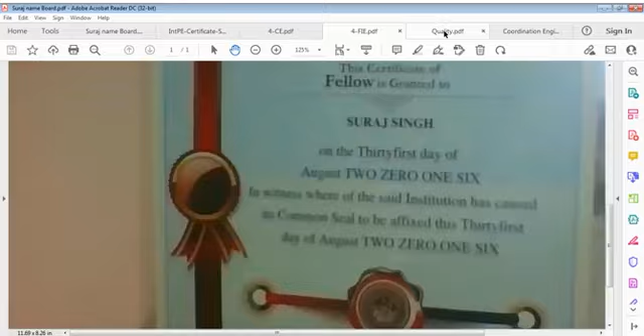Here is my international professional engineer certification for 5 years, valid up to September 2025, and this is chartered, top grade. For the time being I put this off, and I close this file so there is enough space here. Now I'll open the file which is concrete specification.

That is real quality, the real quality file. Let us see what happens. Real quality and real coordination. When I say real quality, it means real achieved quality or to be achieved. It's not in air. It's not in talks only, not in writings only, not in documents only, not in claims only. It should be in reality.

Product must speak. Whatever product, consumable or otherwise, building or structure or machine or an electronic gadget, this product must announce itself: I have been produced according to requirements. Requirements were met when I was produced. I am fully competent, consistent, I am able to perform for you the purpose for which you are buying me. That's what the product should tell. Product must announce.

For youth, for budding engineers, and for common people to realize the value of quality engineering and coordination engineering. In engineering, these are requirements. Even if you don't define them, they are still required. Young engineers must understand this point. Don't run away. Don't skip coordination. Don't skip quality. Even if you work in the designs domain, do not forget that you have to produce your design per quality requirement, and that quality requirement of what?

First time right, all time. It may not be 100% right, but it should be right. You must know which information you need, because of your sequence of work in designs, your calculations, and the site people's expectation from the designer. If I am on site, what expectation do I have of the drawing, what information may site people expect?

Currently in the entire scenario in ours, Bharat, India, and preliminary considerations are there. Someone does good work, but in general, I can say no. Unsuccessful, I'm not getting anything, but I'm trying to see that development, it may be in our country or in other countries. It should be fine, it should be up to mark, if not 100%, maybe some tolerance there.

I have seen Qatar, Iraq, Libya, Saudi, Abu Dhabi, UAE. I have seen throughout my career, particularly post-graduation career, and I have worked more than 20 years in these countries, in different organizations, at different levels. And of course, I cannot say that I did everything right. I can't claim that, because when I was learning and in the field, it's very difficult to find good people to teach you. You won't find teachers in the field, and that's where the deficiency lies.

It's not only in our country, but everywhere. In the practical field, in the construction field, I'm not talking of machines, I'm not talking of industrial works, I'm talking of the construction domain.

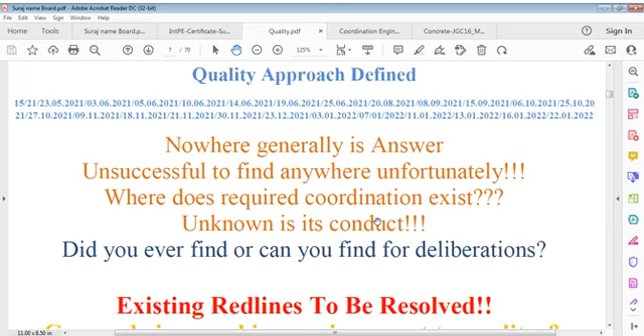Where does required coordination exist? That's the question mark. Unknown is its conduct. That is very important. And that's why I say, did you ever find, or can you find, for deliberations existing red lines to be resolved? Red lines means unknown. We do not know what problems may come, but problems do come because of some missing item, because of lack of coordination or lack of vision, you can say short of vision.

Can we bring the working environment to quality and coordination requirements? That is what we have to answer. Again, I say certain red lines must be turned green, and that must be a must, which you have to understand. Can we know?

Again, there are so many lines, many times I have repeated. I know it, but I'm going to another file, which is now the coordination file, and that is reliable coordination, engineering projects, and engineers, and that is again the same, but with different toning, different. This is a kind of application file.

Applications, I now find a difference in my learning from that. When I started my foreign career, overseas career, I'm not counting my career here at that time because that was a supervision career. Supervision is not as critical as work to be done on site.

And that's why I say missing real coordination means missing good engineering. And if you cannot coordinate, whatever way, you cannot leave it to software, because software can't replace your mind. What you see, what you think, what you do is more important, because you are a teacher, you are a checker, you are an examiner of yourself, you are a student of yourself, a researcher of yourself. Means personal contribution, personal involvement.

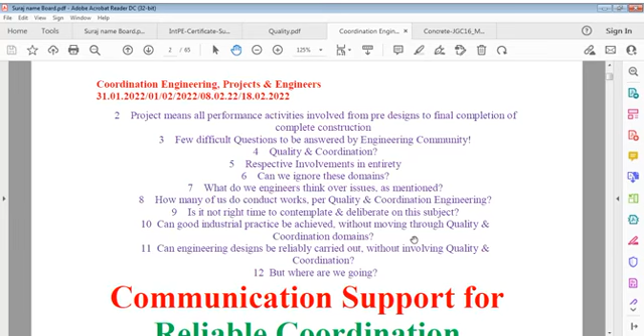At this point we have to keep in mind, and that's why we can say, is coordination a must on every project? Project means all performance activities involved from pre-design stage to final completion of construction. Can we ignore these domains? You have to give an answer. If you ignore these domains, you ignore your project.

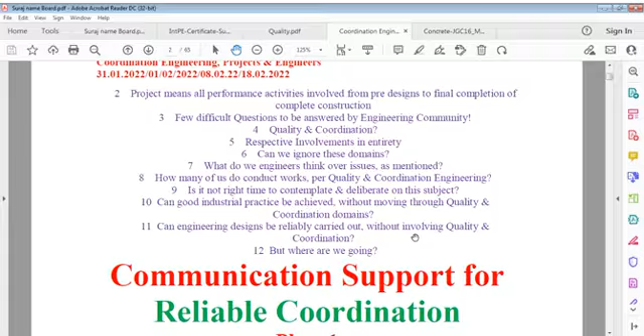What do we engineers think over issues, and how many of us conduct work per quality and coordination engineering? Is it not the right time to contemplate and deliberate on this subject? Can good industrial practice be achieved without moving through quality and coordination domains? Can engineering designs be reliably carried out without involving quality and coordination? But where are we going?

Communication support for reliable coordination - my concentration is on coordination, and I'm very upset to see people are not inclined towards coordination. Had they been inclined, they would have majored in it.

There was an abundance of information available on the internet regarding quality and coordination, but I could not find that information. Even after searching a number of times about coordination and quality, it's only the same repetition, same way - some research paper, some other paper. Actually no material is available, to be very frank, and I'm upset, this is an upsetting situation. That's the only way - I try to fill something on the internet using these videos as a medium, about dissemination of information about quality and coordination. Coordination information is equal to zero on the internet, and quality - as far as it's concerned - it's only system information that is given, not real information.

Quality systems exist, we know that, but the systems are not quality - these are quality relations, how to do that. And that is not actually required. What is required is people should know what work is done, how this work is done. They should know something about that, but that is not available, and particularly in construction engineering it's not at all available.

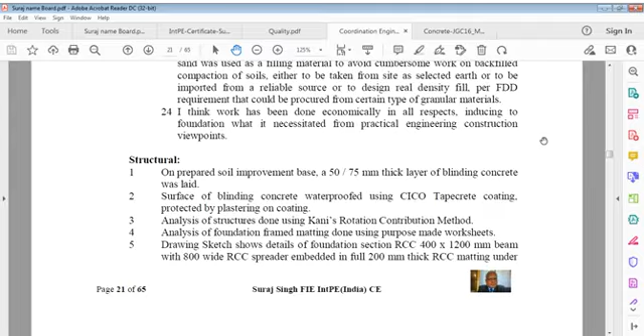yes. Here I think we have to see what is given here. That is about the coordination issue. I think that is a bad one.

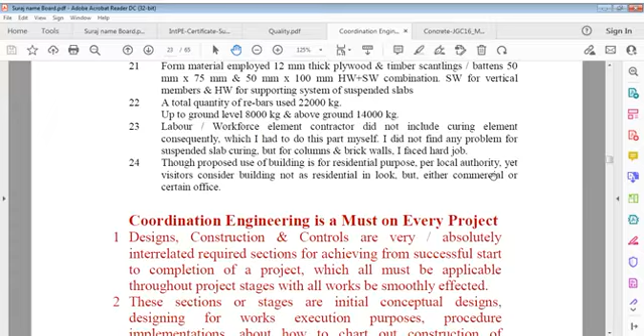Engineering is a must on every project. This is the title: coordination engineering is a must on every project. And it's written about design and construction. These are absolutely interrelated terms, and these sections are for achievement from successful start to successful completion. I'm saying successful start because there's a meaning behind that.

We have to start, of course, but successful start means we should have all information ready with us before starting or commencing some work. If we have to commence some work, then we should have complete information. There is no meaning if you start some work and then you stop after some time, you hold work because you don't have complete information. I think that is not the professional way.

You should know, let us say, at least for a couple of months that you are going to work for, when you plan that work, it should move without any problem, and if some information is missing, that should come by the time that activity is started. That should be planned. Sometimes information is not available, but it doesn't mean that we can't work, because there is so much information required on every project. Sometimes we don't have some, but we should keep in mind that when that activity comes, that information must be available by that time.

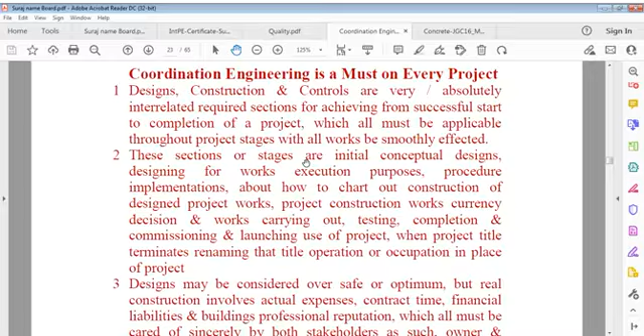I always investigate on me. I only apply corrections on me, and that's where it's important. Designs may be considered over safe or optimum, but the main point lies in how your design shall be transformed to physical work. To what level it is done, how many percent it is achieved, it depends on that.

And that's why I say it's very important to keep an eye, means mental eye as well as physical eyes, both. Not simply viewing eyes, means eyes that can accept something, cannot accept something. A constant touch is required on activities. You know, our people everywhere are enthusiastic. All are pro quantity. They do not really know what is the value of quality.

It's the fault of the system. Quantity is preferred by everybody, but everybody has to keep in mind: if you prefer quantity, quality is an integrated part of that. And if you don't do quality, only quantity, then your work is not accepted. And it's a very important part. We cannot say no, and we control it first. So we'll come back to this.

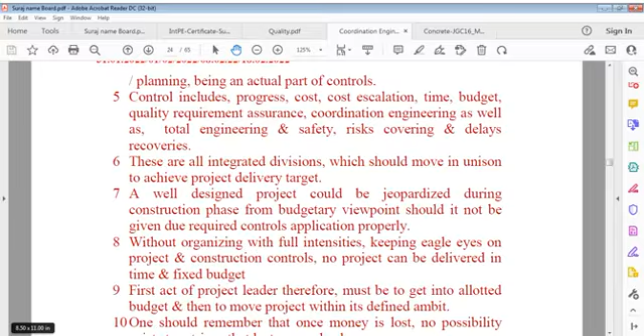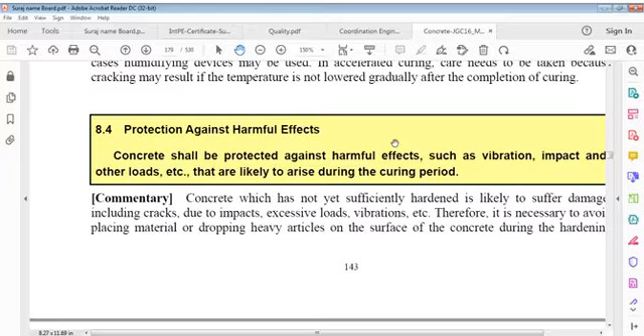Let me go now, because we are talking quality, and quality is very important everywhere. We understand that point. It's 1 hour of talk, and I don't want to bore you more. We'll come back to this issue later, and I'm going to construction of concrete, work of concrete, and that's an important point. Let's go to page 180 and see what's there. Where I stopped last time was the protection against harmful effects, and this is here.

You can see it is temperature controlled curing. I think we start with that. We have to see what is temperature controlled curing. It's concrete we are talking about now. It's the Japan specification, not mine. I'm just giving reference to this. I shall also give reference to Qatar standard specifications; I'll bring that to you a little later. It's 530 pages, but pages are not an issue here. I'm trying to bring to you a contemplation of specifications, because specifications are a very important part.

And I have worked in fields also for many years, and I don't want to boast about that. If I can find a file, I'll be glad to show you that. Maybe we don't discuss that now, but it can be shown. It was somewhere here, I'm sure. Let me go back and see where it was.

Renewal, let me see here. IP 2025, and here it could be an IntPE certificate. No, it's not that. I want to see my CV file. It's a problem finding sometimes. CV, where is the CV? Here it is. I'd like to show you my CV. Just a minute, please. That's an important file for me.

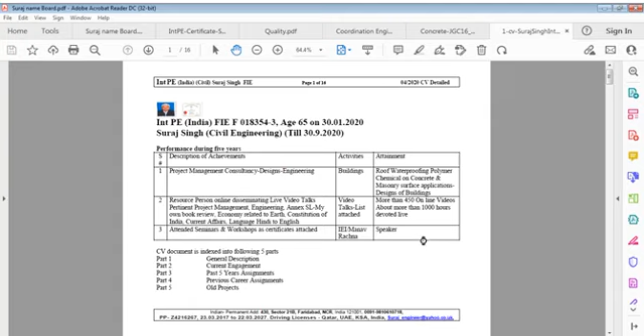So it's okay. Now this file which I'm trying to show you is my CV file. I'm not going to talk about my personal details. I'm going to talk about the types of works I did.

Recently, I was involved in my own work, that is building, and it was regarding roof waterproofing, polymer chemical on concrete. You can see this roof waterproofing, polymer chemical on concrete and masonry surface applications, as application of polymer cement on exposed surfaces, vertical and horizontal. And I have also, of course, these videos I'm showing to you, so I'm not going to boast about that.

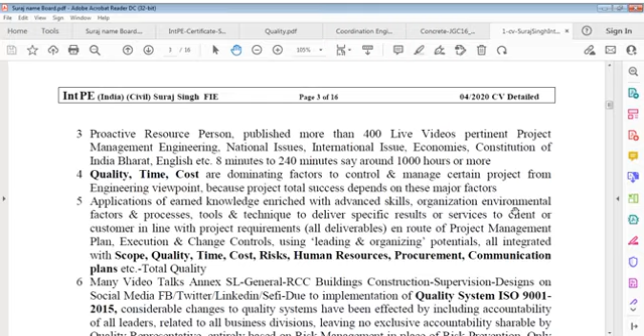Now what I'm going to say is the projects that I carried, and that's very important. And here I'm writing some notes also. First of all, I have written item number 1: what do I understand by profession of project management, organization, discipline and quality systems. In ISO 9001:2015, civil engineers must be involved with all disciplines for coordination, objectives, total quality management, and of course proactive resource persons. Published more than 400 live videos.

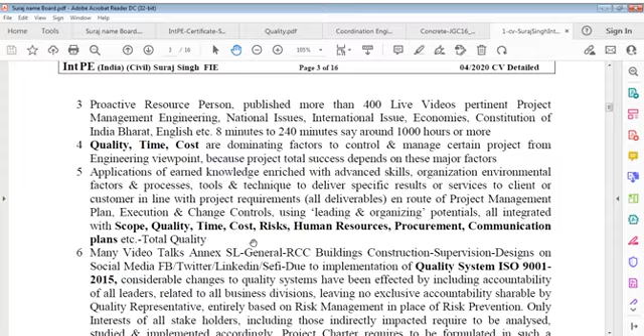Quality, time and cost are very important to be discussed, parameters, or you can say knowledge areas, in works we have to do. These are scope, quality, time, cost. Scope is the starter one. What scope, what level of quality we have to deliver, what is the time for that project, what's the cost involvement, what is the risk factor, human resources involvement, procurement requirements, communication plans.

And these points are necessary for defining what is quality, total quality, and total organization. These points are very important: scope, quality, time, cost, risks, human resources involvement, procurement procedures, communication plans, and now coordination plans as well. Many videos I have delivered regarding Annex SL of quality requirements, quality system, and RCC buildings, construction, supervision, designs on social media.

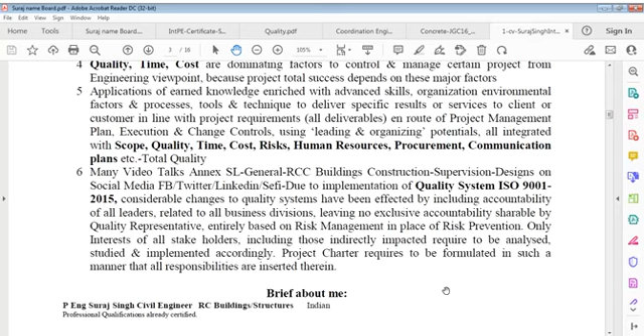Considerable changes to the quality system have been made from 2015 compared to 2008, the old one which is obsolete now, such as the responsibility of leaders. Considerable changes have been effected by including accountability of all leaders related to all business divisions, leaving no exclusive accountability to the quality representative, entirely based on risk issues, risk management, in place of risk prevention. Interests of all stakeholders, including those indirectly impacted, require to be analyzed, studied, and implemented accordingly. The project charter requires to be formulated in such a manner that all responsibilities are inserted therein.

Now, you can see that in 2016 I was certified as Fellow of the Institution of Engineers. In 2012 and 2015, it was International Professional Engineer. In 1995, 2000, 2005, Certification of Professional Engineers. And Chartered Engineer 1986 and Bachelor of Engineering 1980, Section B, IEI, Institution of Engineers. And before that, I passed my diploma in civil engineering.

I would define myself as a multifaceted personality in project organization and management, engineering designs and construction, contracting, site and office engineering, with full adaptability and required acumen, professionally dedicated, experienced in working under stress with resilience to achieve target objectives, a reliable knowledge disseminator to public and professionals on social media forums like Facebook, Sefi, etc. I have 35-plus years in management, construction, designs, and out of that approximately 20 years or more in GCC countries, and some experience in India, on projects of civil RCC buildings with multiple services, structures, oil, EPC projects, construction, engineering designs, consultancy, coordination, estimation, proposals.

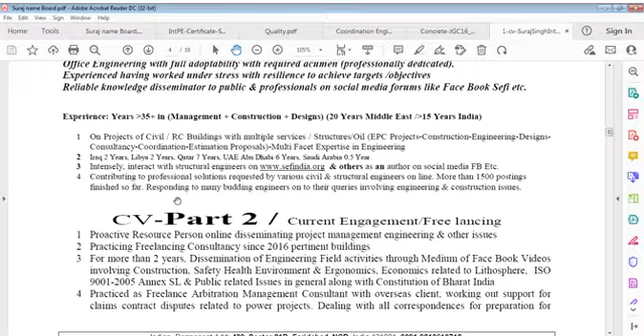I have worked in Iraq, Libya, Qatar, UAE, Saudi. I intensely interact with structural engineers on Sefi, that is sefindia.org, and others, as an author on social media, Facebook, contributing professional solutions requested by various civil and structural engineers online. Currently a proactive resource person online, disseminating project organization engineering, project management engineering, and other issues, and practicing freelance consultancy. More than 2 years of dissemination of engineering field activities through the medium of Facebook.

This is regarding field engineering, field activities, and also construction safety, health, environment, ergonomics, economics related to lithosphere, ISO 9001 and Annex, and public related issues in general, along with the Constitution of Bharat, India. Practice as freelance arbitration management consultant, 2005 to 2015, sorry for that error. Management consultant for overseas clients, working out support for claims, contract disputes related to power projects, dealing with all correspondence for international and domestic arbitration.

Also visited Shanghai, China in connection with supporting dispute resolution procedures, writing books on project safety activities, construction method statements, contract organizational management, facilities plans, and currently working on freelance projects.

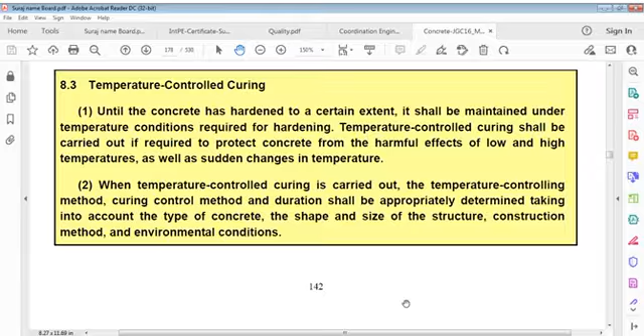When temperature control curing is carried out, temperature control methods, curing control methods, and duration shall be appropriately determined, taking into account type of concrete, shape and size of structure, construction method, and environmental conditions. And that is for temperature control.

Here are now some comments about this. Everybody knows cement hydration is remarkably influenced by curing temperature of concrete. Except in special cases, concrete temperature begins to be influenced by outside temperature just after concrete is mixed. Maybe there are some cases where it doesn't apply, but that's very important. That's the natural process of concrete.

In particular, concrete surface or thin members such as walls and slabs are easily affected by outside temperature. In general, relationship between curing temperature, concrete age, and compressive strength can be expressed by the concept of maturity. When curing temperature is lower, the period to obtain necessary compressive strength becomes longer. On the other hand, when curing temperature is higher, it becomes shorter.

However, effect of curing temperature depends on type of cement. Blended cements such as fly ash cement or blast furnace cement tend to be sensitive to curing temperature. Therefore, for blended cements, a longer curing period than ordinary Portland cement is required, especially when curing temperature

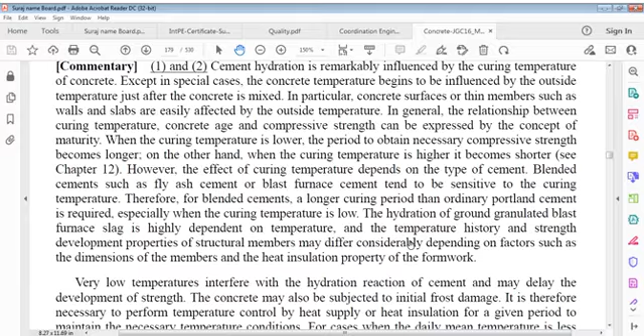is low. Hydration of ground granulated blast furnace slag is highly dependent on temperature. And temperature history and strength development properties of structural members may differ considerably depending on factors such as dimensions of members and heat insulation property of formwork. That is a very important point to note, though it's not given in this specification.

We have different dimensions of various members. When you say thin members, it means all sides are less than 80 centimeters or 800 mm. For example, walls and generally columns also, because columns rarely are more than 800 mm, if there's a big column, one side may be less. So section minimum dimension should be 800 mm. If it is less, it is a normal member, but when it's 800 mm minimum, it can be called a thick member.

So generally columns are considered thin members, and also your foundations, independent footings, combined footings, in which minimum dimension is less than 800 mm. Generally these are all classified as thin members. Take, for example, walls which are 150 mm or 200 mm, foundations which are 400 mm or 500 mm thick. Size may be 2 meter, 3 meter, but as far as least dimension is concerned, that should be less than 800 mm.

Same way for beams, suspended beams, down stand beams or upstand beams, and also suspended slabs or cantilever slabs or other slabs. Thickness where 800 mm is rare, except maybe in some case of storing warehouses buildings. Otherwise 800 mm is very big. Even your runways at airports are not that much. So that's what I'm saying, thick members and thin members.

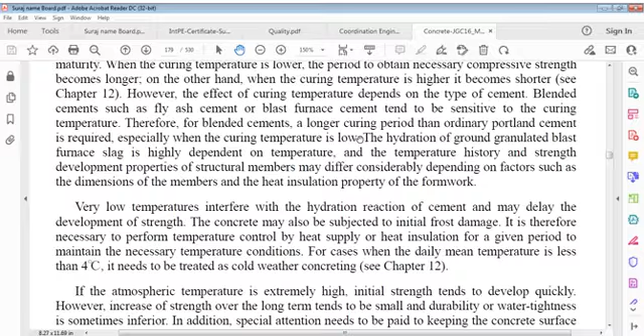That may delay development of strength. Concrete may also be subject to initial frost damage, and it is therefore necessary to perform temperature control by heat supply or heat insulation for a given period to maintain necessary temperature conditions. For cases when daily mean temperature is less than...

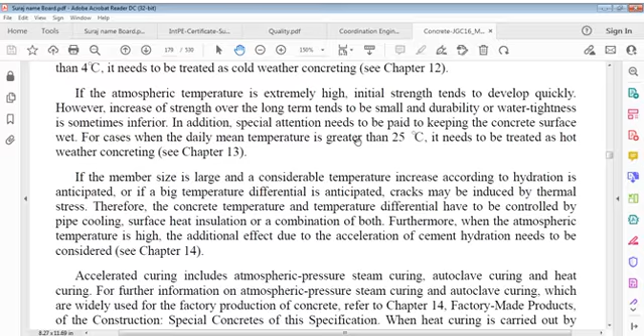...temperature is extremely high, initial strength tends to develop quickly. However, increase of strength over the long term tends to be small, and durability or water tightness is sometimes inferior. In addition, special attention requires to be paid to keeping concrete surface wet. For cases when daily mean temperature is greater than 25 degrees Celsius, it requires to be treated as hot weather concrete - we'll see it later on.

If member size is large and a considerable temperature increase according to hydration is anticipated, or if a big temperature differential is anticipated, cracks may be induced by thermal stress. Therefore, concrete temperature and temperature differential have to be controlled by pipe cooling, surface heat insulation, or a combination of both.

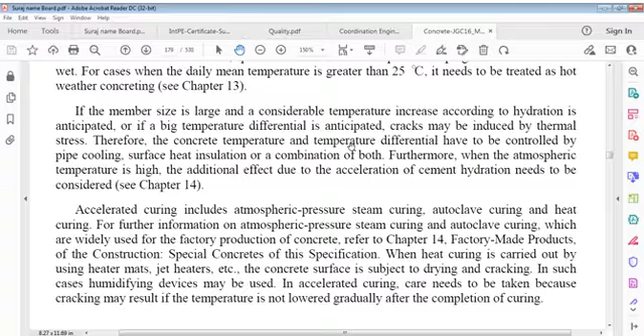Furthermore, when atmospheric temperature is high, the additional effect due to acceleration of cement hydration requires to be considered. Accelerated curing includes atmospheric pressure based steam curing - that is not pressure one, atmospheric pressure steam curing - autoclave curing, and heat curing. For further information on atmospheric pressure steam curing and autoclave curing, you have to refer to it.

We'll discuss that also - factory made products of construction, special concretes of this specification. When heat curing is carried out by using heater mats, jet heaters, etc., the concrete surface is subject to drying and cracking. In such cases, humidifying devices may be used.

In accelerated curing, care needs to be taken because... this is very important from every viewpoint and must be taken care of. Otherwise, we don't know what we do, how we do.

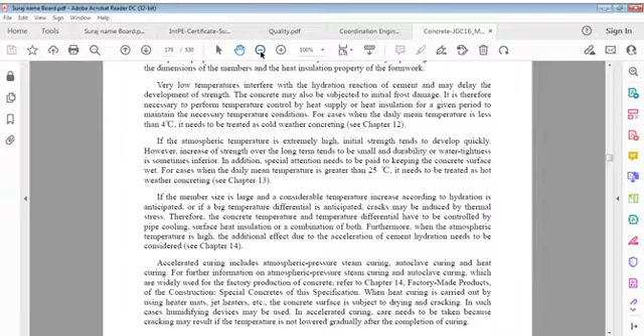This is what I said, we must have gone through this. We will continue with this, and here is protection against harmful effects such as vibration, impact and other loads. This is regarding that one.

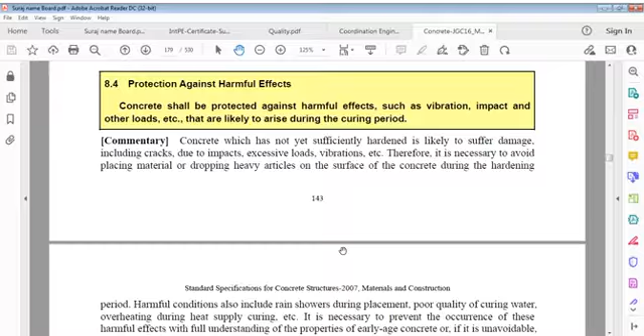Concrete which has not yet sufficiently hardened is likely to suffer damage, including cracks due to impacts, excessive loads, vibrations. Therefore, it is necessary to avoid placing materials or dropping heavy articles on surfaces of concrete during the hardening period. Harmful conditions also include rain showers during placement, poor quality of curing water, and overheating during heat supply curing. It is necessary to prevent occurrence of these harmful effects with full understanding of the properties of early age concrete, or if unavoidable, to protect concrete from their influences.

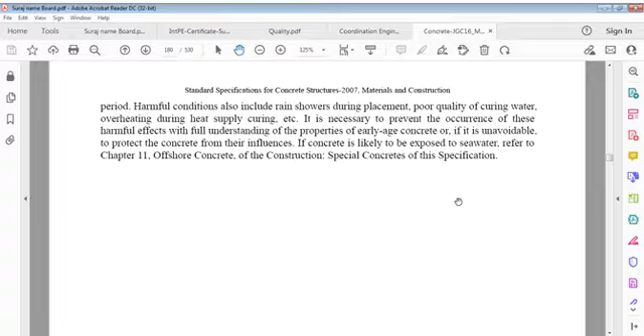If concrete is likely to be exposed to seawater, refer to this chapter. Now we are here for joints.

Yes, okay, joints. Joints shall be located in the structure as specified in design drawings and specifications. If joints not specified in designs are to be provided, their locations, directions and construction methods shall be specified in the construction plan so that strength, durability, water tightness and appearance of the structure are not degraded.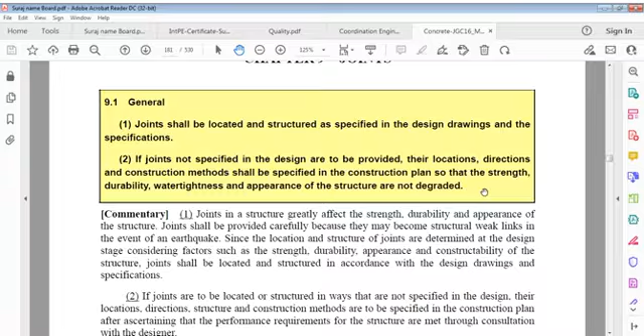Joints in a structure greatly affect strength, durability and appearance of the structure. Joints shall be provided carefully because they may become structural weak links in the event of an earthquake. Location and structure of joints are determined at the design stage, considering factors such as strength, durability, appearance and constructability of the structure. Joints shall be located and structured in accordance with design drawings and specifications.

If joints are to be located or structured in ways not specified in design, respective locations, directions, structure and construction methods are to be specified in the construction plan, after ascertaining that performance requirements for the structure are met, through consultation with the designer.

Construction joints. A construction joint should in general be designed at a position where shear force is as small as possible. Joint surface should be perpendicular to the direction of compressive force acting on the member.

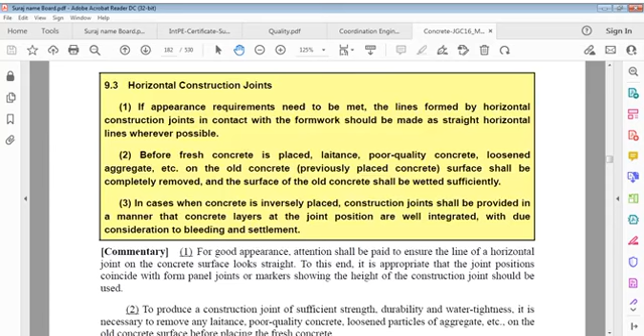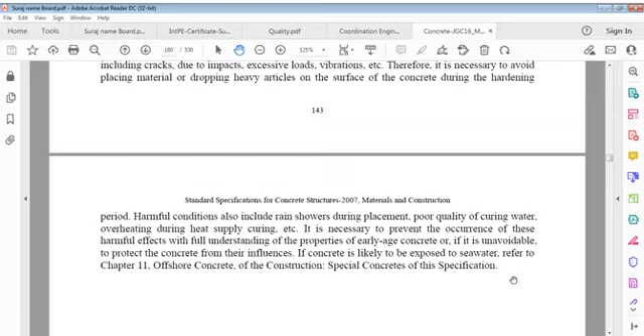Well, we have covered a long distance, but it's again not working. What's the reason? Why is the page unresponsive? It's not responsive. It's saying why it's not responding. It's... no, a little responsive it is.

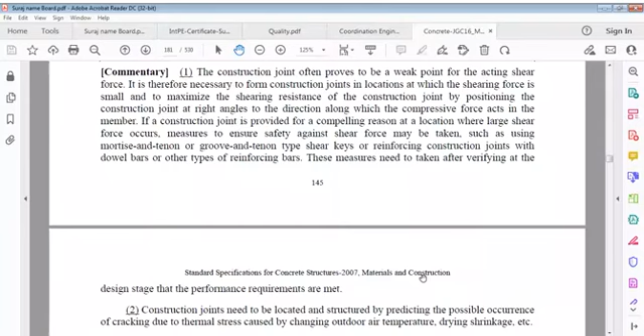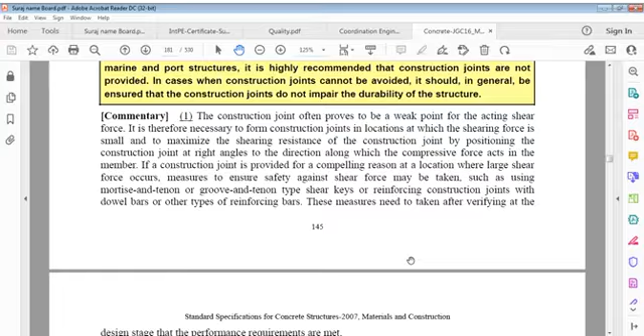Construction joint often proves to be a weak point for acting shear force. It's therefore necessary to form a construction joint in locations where shearing forces are small, and to maximize shearing resistance of the construction joint by positioning the construction joint at right angles to the direction.

That's done, and here the horizontal joint was done. Now for the commentary of these points: for good appearance, attention shall be paid to ensure that the line of horizontal joint on the concrete surface looks straight. It is appropriate that joint positions coincide with form panel joints, or markers showing the height of the construction joint should be used.

To produce a construction joint of sufficient strength, durability and watertightness, it is necessary to remove whatever laitance is available, whatever poor quality concrete, and loosened particles of aggregate, etc. on the old concrete surface before placing fresh concrete.

For processing joint surfaces on old concrete, pre-hardening processing, post-hardening processing, or a combination of both can be used. It's a good one to consider, it's not bad; in fact, we can start.

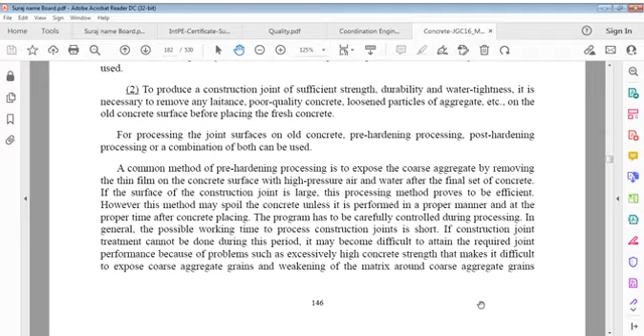Okay, that point is understood. Now, for processing joint surfaces, we said both processing methods can be used: pre-hardening and post-hardening. A common method of pre-hardening processing is to expose coarse aggregate by removing the thin film of concrete surface with high pressure air and water after final setting of concrete.

If the surface of the construction joint is large, this process method proves to be efficient. However, this method may spoil concrete unless it is performed in a proper manner and at the proper time after concrete placement. The program has to be carefully controlled during processing.

In general, the possible working time to process a construction joint is short. If construction joint treatment cannot be done during this period, it may become difficult to attain the required joint performance, because of problems such as excessively high concrete strength that makes it difficult to expose coarse aggregate grains, and weakening of the matrix around coarse aggregate grains caused by excessive scraping.

To ease this working restriction, it is effective to apply a retarder whose principal ingredient is sodium gluconate. Remember this: sodium gluconate, applied on the surface of concrete to process construction joints. By using this kind of retarder, processing time can be extended because hardening of the concrete joint surface is intentionally delayed. This material is sodium gluconate, and that is a retarder - its principal ingredient is sodium gluconate.

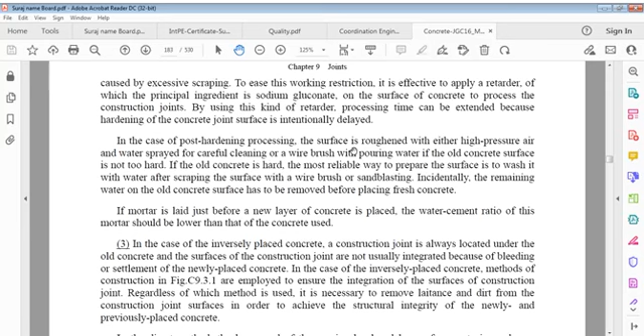In case of post-hardening processing, the surface is roughened, either with high pressure air and water sprayed for careful cleaning, or with a wire brush along with pouring water.

If old concrete surface is not too hard. If old concrete is hard, the most reliable way to prepare the surface is to wash it with water after scraping the surface with a wire brush or sandblasting. Incidentally, remaining water on the old concrete surface has to be removed before placing fresh concrete.

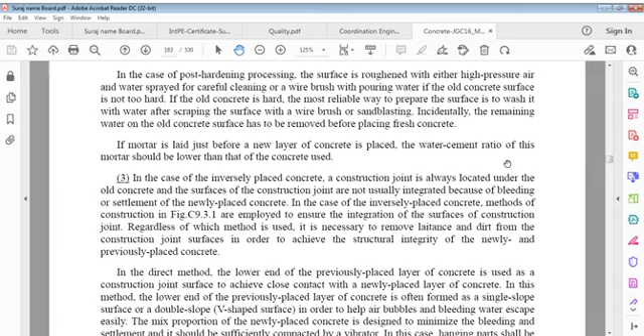In case of inversely placed concrete, methods of construction are employed to ensure integration of surfaces of construction joint. Regardless of which method is used, it is necessary to remove laitance and dirt from construction joint surfaces in order to achieve structural integrity.

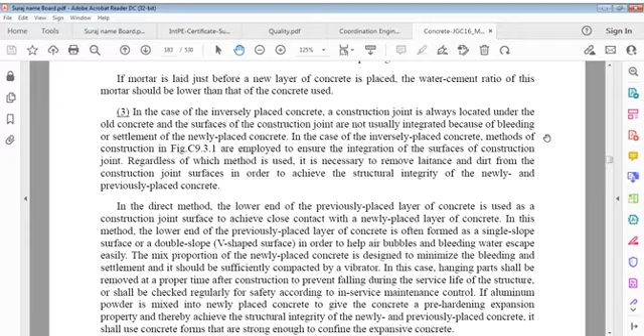...of previously placed layer of concrete is used. Lower end of previously placed concrete is used as a construction joint surface to achieve close contact with newly placed layer of concrete. In this method, lower end of previously placed layer of concrete is often formed as a single slope surface or a double slope surface in order to help air bubbles and bleeding water escape easily.

Mix proportion of newly placed concrete is designed to minimize bleeding and settlement, and it should be sufficiently compacted by a vibrator. In this case, hanging parts shall be removed at a proper time after construction to prevent falling during service life of structure, or shall be checked regularly for safety according to in-service maintenance control.

If aluminum powder is mixed into newly placed concrete to give concrete a pre-hardening expansion property and thereby achieve structural integrity of newly and previously placed concrete, we shall use concrete forms that are strong enough to confine expansive concrete.

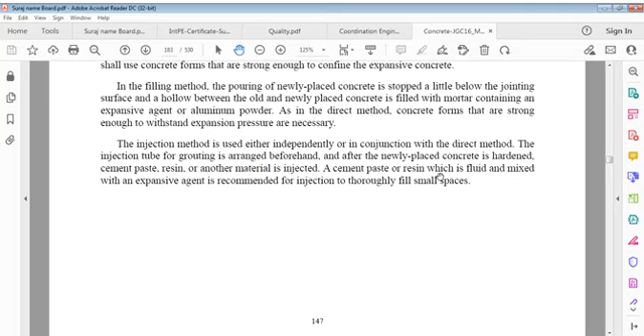Injection for grouting is arranged beforehand, and after newly placed concrete is hardened, cement paste, resin or another material is injected. A cement paste or resin which is fluid and mixed with an expansive agent is recommended for injection to thoroughly fill small spaces. That's what joint is. We have to think of this joint now.

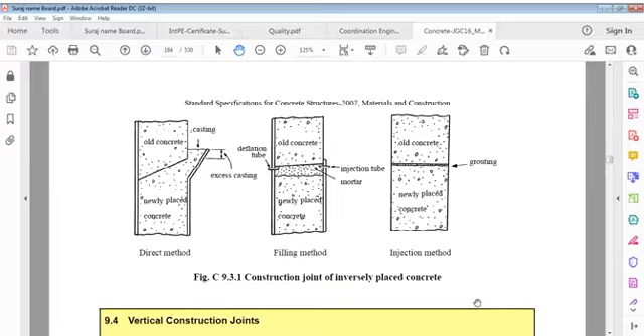And this standard specification, I'll just blow up a little so that we can see it. Now, this old concrete is sloping, or it could be like this, doesn't matter, or it could be like this as well. Alright, this is casting here, we have to do newly placed concrete here, and this is pouring here, and this is excess casting. So actually casting was up to here.

And newly placed concrete, this is direct method, filling method, and this is injection method. Old concrete, and this is newly placed concrete, this is injection tube, this is the deflation tube, and here is mortar in this portion. This is filling method, and this was direct method. In filling, we have to fill this portion here. Injection method, old concrete, this is newly placed concrete, inversely placed. Now, vertical construction joints.

Construction joints. Formwork of vertical construction joint shall be firmly supported. Before placing fresh concrete, surface of old concrete shall be sufficiently moistened and coated with cement paste, mortar or epoxy resin after roughening surface by scraping with a wire brush or chipping. Placement and compaction shall be performed so that newly placed concrete reaches every corner of joint surface to achieve close contact with joining surface. As a general rule, a water stop should be used for vertical construction joint in concrete structures that require water tightness.

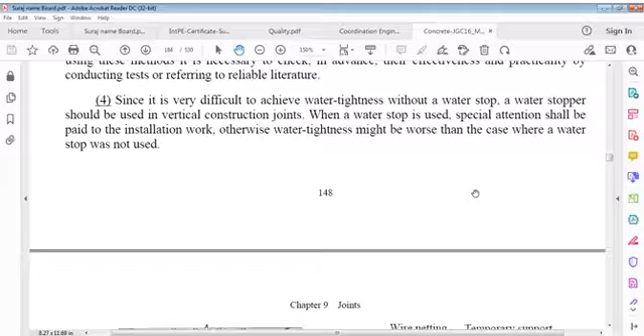A water stop is used in vertical construction joints. When a water stop is used, special attention must be paid to installation works. Otherwise, water tightness might be worse than the case where a water stop is not used. That's why, see.

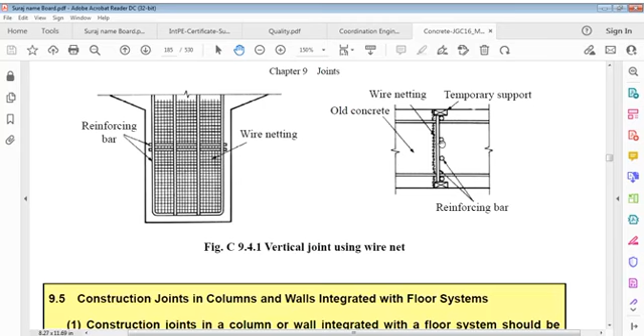Here is old concrete. You can see this is old concrete. We've done just a shutter for that one. These are new bars and this continues like this, and the temporary supports are here. And this is wire netting. So this is new concrete. When you remove this shutter, this will be in contact with that vertical joint using wire net. So that's what we call vertical joints using wire net.

Construction joints in columns and walls integrated with the floor system. Construction joints in a column or wall integrated with the floor system should be formed adjacent to the border between them. Concrete in haunches shall be placed at the same time as floor concrete. So the first requirement is construction joints in a column or wall integrated with the floor system should be formed adjacent to the border between them. Concrete in haunches shall be placed at the same time as floor concrete.

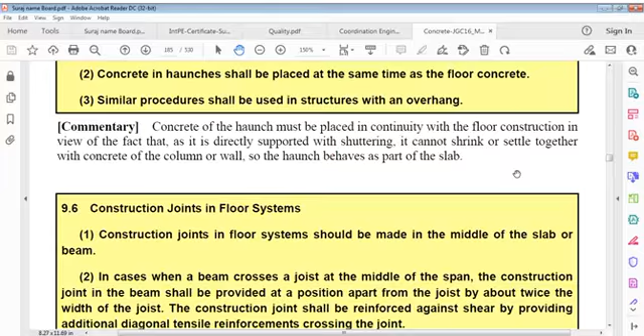Similar procedures shall be used in structures with overhangs. Concrete of the haunch must be placed in continuity with floor construction in view of the fact that it is directly supported by shuttering. It cannot shrink or settle together with the concrete of the column or wall, so the haunch behaves as part of the slab. Construction joints in floor system.

Construction joints in floor system. Construction joints in floor systems should be made in the middle of the slab or beam. In cases when a beam crosses a joist at the middle of a span, construction joints in the beam shall be provided at a position apart from the joist by about twice the width of the joist. The construction joint shall be reinforced against shear by providing additional diagonal tensile reinforcements.

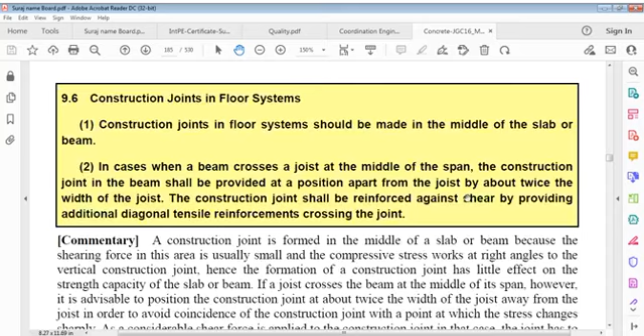Crossing joint. The construction joint is formed in the middle of a slab or beam because the shearing force in this area is usually small. This stress works at right angles to the vertical construction joint. Hence, formation of the construction joint has little effect on the strength capacity of the slab or beam. If a joist crosses a beam at the middle of the span, however, it's advisable to position the construction joint at about twice the width of the joist away from the joist in order to avoid coincidence of the construction joint.

Here is what we see, reinforcement for the construction joint. This is your joist here, and here is the construction joint; the center line is here and about 2 B0 from here. This is steel reinforcement, and this is 2 B0, about B0 is this. This is the joist. If a joist exists, the separation should be at least twice the width of this, and that can be the construction joint. This is very common; there's some shear stress, minimum and maximum, here, so at least it will be done this way.

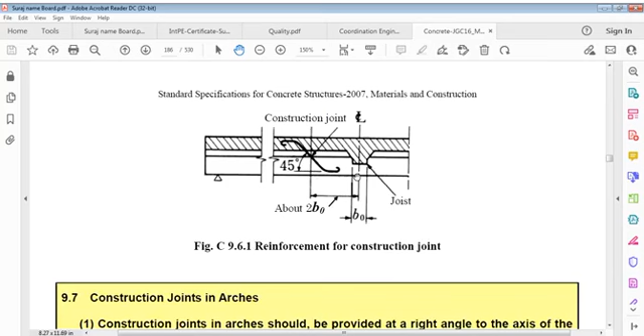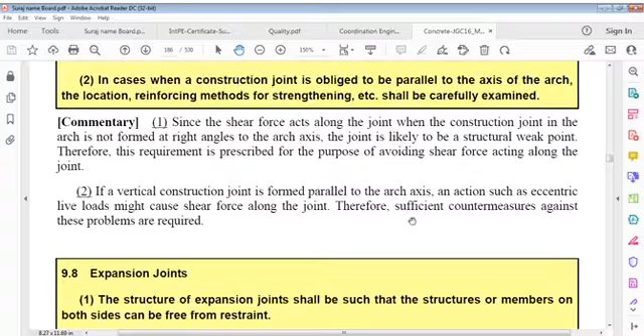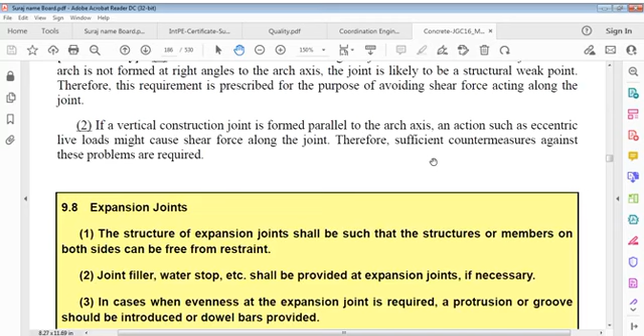Construction joints in arches. Construction joints in arches should be provided at right angles to the axis of the arch. In cases when the construction joint is obliged to be parallel to the axis of the arch, locations, reinforcing methods for strengthening shall be carefully examined. Since shear force acts along the joint when a construction joint in an arch is not formed at right angles to the arch, the joint is likely to be a structural weak point. This requirement is prescribed for the purpose of avoiding shear force acting along the joint. If a vertical joint is formed parallel to the arch axis, an action such as eccentric live load might cause shear force along the joint. Therefore, sufficient countermeasures against these problems are required.

Expansion joints. The structure of the expansion joint shall be such that the structure or members on both sides can be free from restraint, or dowel bars provided. Evenness at the expansion joint is required. A protrusion or groove should be introduced, or a dowel bar provided, to form an expansion joint. Either both joint structures must be perfectly discontinuous or, depending on the type of structure and location of installation, concrete may be discontinuous and reinforcing bars may remain continuous.

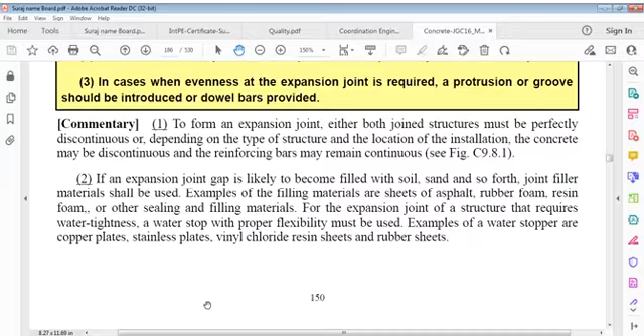To form an expansion joint, either both joint structures must be perfectly discontinuous or, depending on the type of structure and location of installation, concrete may be discontinuous and reinforcing bars may remain continuous. If an expansion joint gap is likely to become filled with soil, sand and so forth, joint filler materials shall be used. Examples of filling materials are sheets of asphalt, rubber foam, resin foam, or other sealing and filling materials.

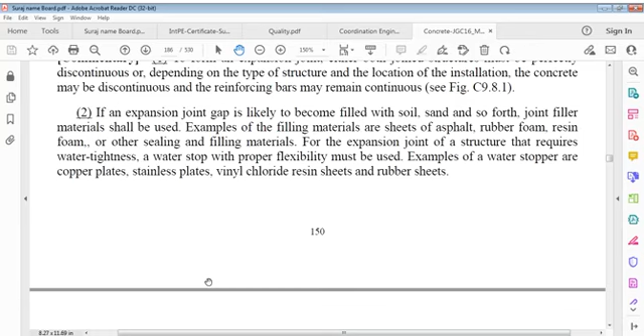For an expansion joint of a structure that requires water tightness, a water stop with proper flexibility must be used. Examples of water stops are copper plates, stainless steel plates, vinyl chloride resin sheets and rubber sheets.

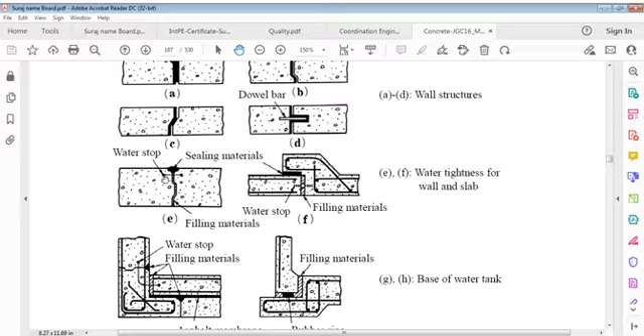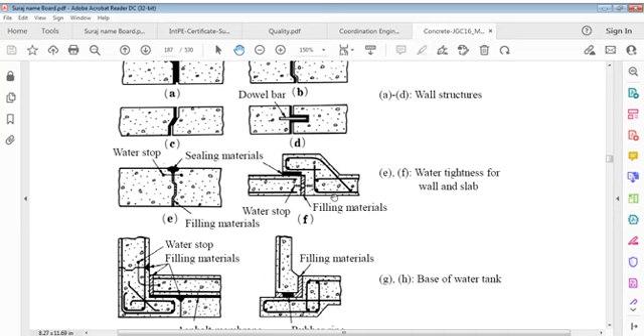This is the water tank here. Base means water tank. And here is asphalt membrane. This is filling material. This is water stop here. And of course here, this is filling material, this is rubber ring, and here is the hinge. You put the hinge, it's like that. So water stop here.

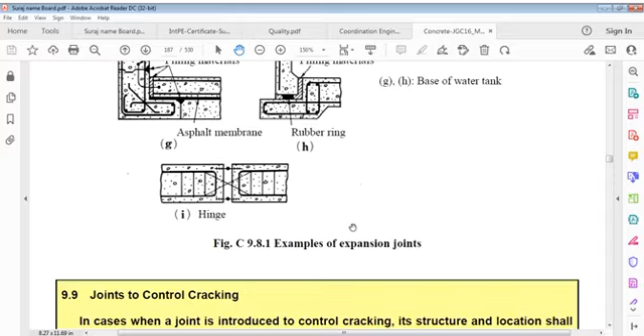Joints to control cracking. In cases when a joint is introduced to control cracking, its structure and location shall be in accordance with design documents.

In case of a concrete structure, there are many factors that cause deformation besides applied forces, including temperature change due to heat of hydration and outer temperature, drying shrinkage, and so on. Cracks may develop if such deformation is restrained. It's therefore desirable to control cracks by forming notches in cross sections at given intervals in order to concentrate cracks in a given area. Crack inducing joint.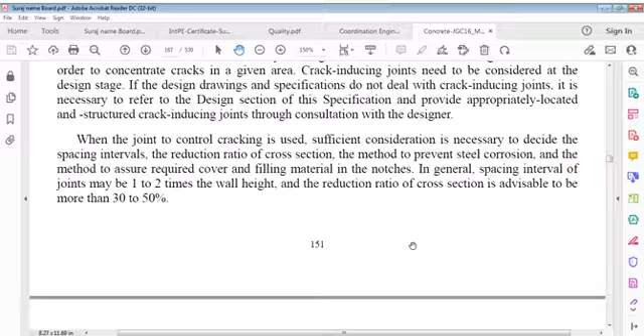There are some joints shown here. Here is wall height, you can say H. Spacing interval of joints, this is here, you can say joint. And if you see the section here, this is width D, and here is the joint, 0.1D. 0.1D means 10% of depth or width. 10% is

And these are spacing intervals of joints to control cracking. This is H height, this is the interval, and 0.1D is that one. And this is section A here, 0.8D. This is D, and it has a water stop. If you see here, this is 0.4D and 0.4D, that's okay. And this pipe here, otherwise water stop here.

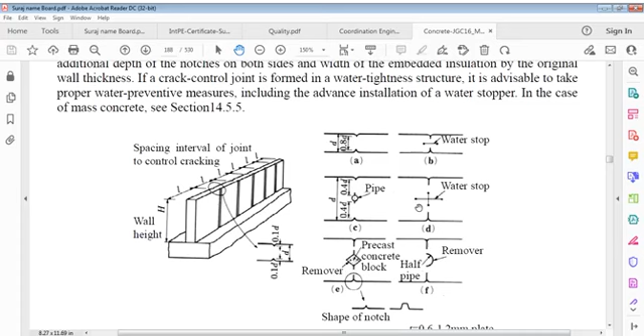And also here a precast concrete block you can put in here, and this is the shape of notch. Here is half pipe remover, half pipe shape of notch, and here's the distribution bars, water stop here, this is D, and there is filling material, filling of resin mortar. These are examples of joints to control cracking.

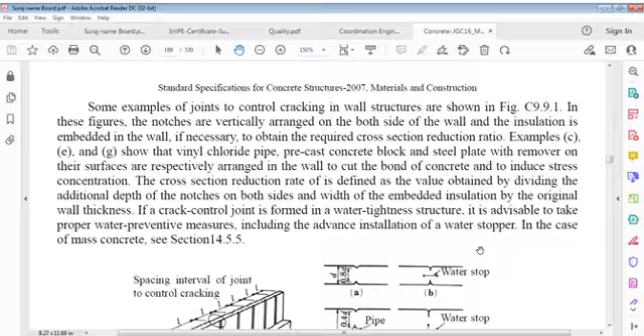We can just have a complete look at this, how does it behave, how is it required. It's to be understood properly, in the correct sense. You can read this as well, it's fine.

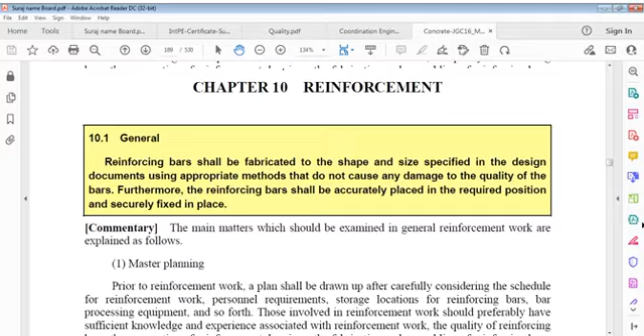We have to go to our next topic. I think there is the chapter on reinforcement to follow. After that, joints of reinforcing bars, and then placement of pre-assembled reinforcing bars, and then the chapter on formwork and shoring. Formwork and shoring loads, vertical loads, horizontal loads, lateral pressure of concrete. We have to do all, and quality.

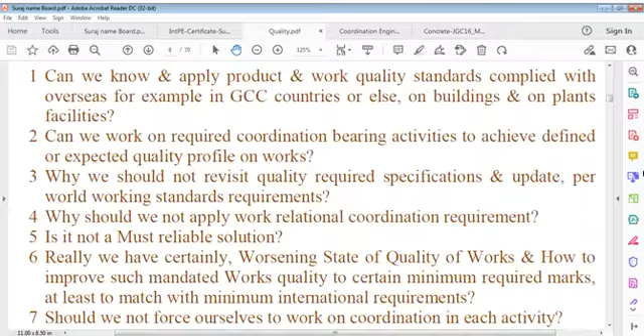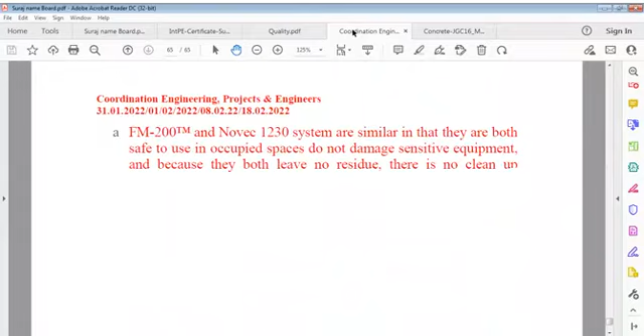And therefore it's a very important point we have to understand here. You have to deal with this coordination engineering issue. It's a must, reliable coordination in engineering projects, and also quality that we have to deal with as well. That is the quality approach we have to handle. And this is, as usual, certificates; we have to be very clear about this. We have to study these documents and be very careful about their use.

We have gone through some chapters today, better than yesterday, because there were some signals, of course broken signals, no problem. Whatever you get is fine. For example, 73 kbps currently and 2 fps, it is not reliable signal. We can't depend upon it, but whatever information was available, that's our source, and we cannot say more than that.

It's a very, very important point. We have to understand this. We're talking about quality and coordination, about reliability, about what we have to do in our practical work. Work is not just books. Textbooks are our basis in the science, but practical work is for people. We have to deliver civil engineering products which are very significant for development, and we have to be very sure that our processes are going to work for many decades, in some cases maybe more than 10 decades if properly retrofitted from time to time.